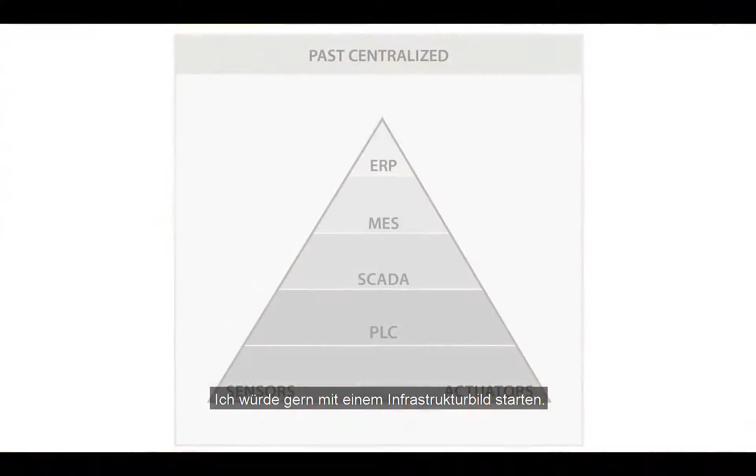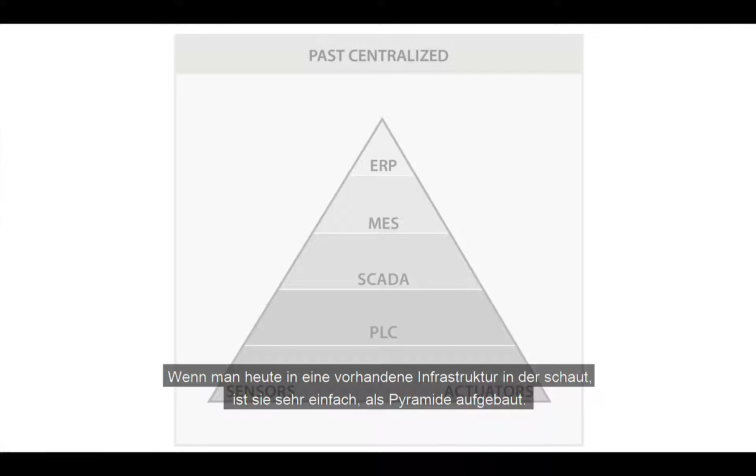My name is Sai Seidel. I'm working in corporate marketing, and I'm also talking to you about that topic. And I want to start with an infrastructure picture we want to show to you. So if you look into the proven infrastructures you have today in your automation hierarchy, it's quite simple. It's a pyramid, as you know, as you probably work on, which is working, and has been working for a long time.

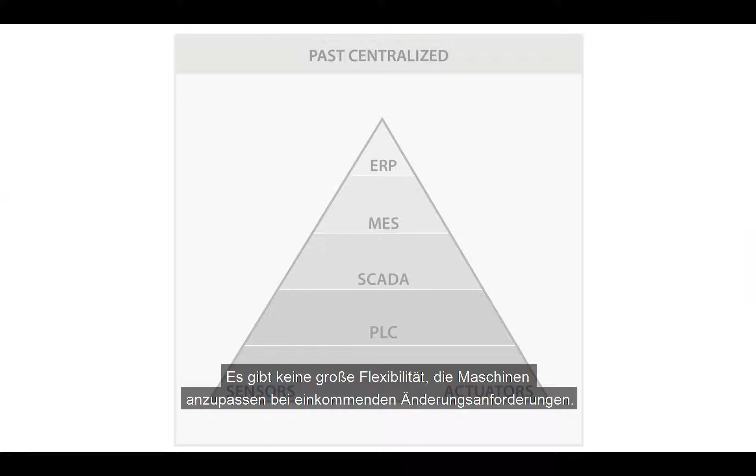But as we all know, you have a design of your machine which will be quite monolithic. You don't have the flexibility to change some things if you want. So as soon as you get a customer requirement to change something in your machine, to adapt something, to improve something, it's getting a little bit harder because you have to start on the top and then you have to go down. And the control is the heart of the machine. As a lot of customers told me, they have the control in the middle, in the core of the machine.

Of course, the whole stuff is usually built up in IP20 in a big part of it, and that makes quite a big footprint of the machine because the cabinet is quite big, as you know. And the data flow in that whole automation is quite strict because you have that hierarchy, and there's no way outside of that hierarchy. Of course, in the end, it's very costly, can be very inefficient, and you have to take care how to improve something. And if you think about how you get up a modern infrastructure, maybe you can take this part.

Yeah, thanks, Sai. So what we saw over the course of especially the last 5 or maybe 10 years, along with technology trends of industrial Internet of Things and Industry 4.0, is that customers step by step get away from this very static pyramid architecture in automation. They are not at a fully interconnected cyber-physical system yet, but what we see today is that customers take much more care about modularization, breaking their system into modular standardized components, routing communication that is meant to control the process still through the PLC.

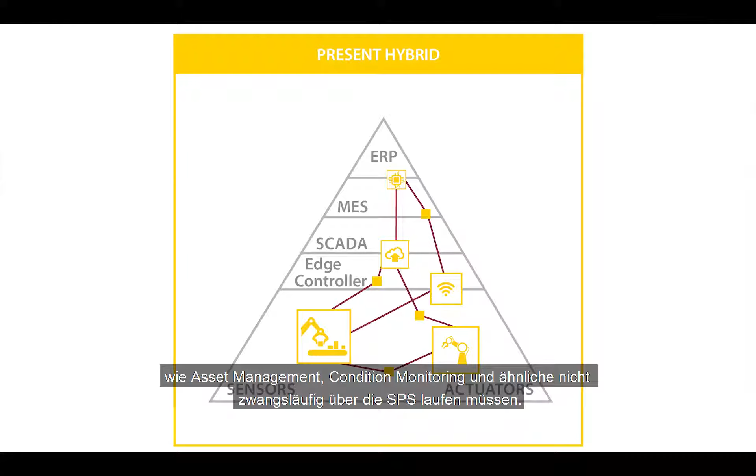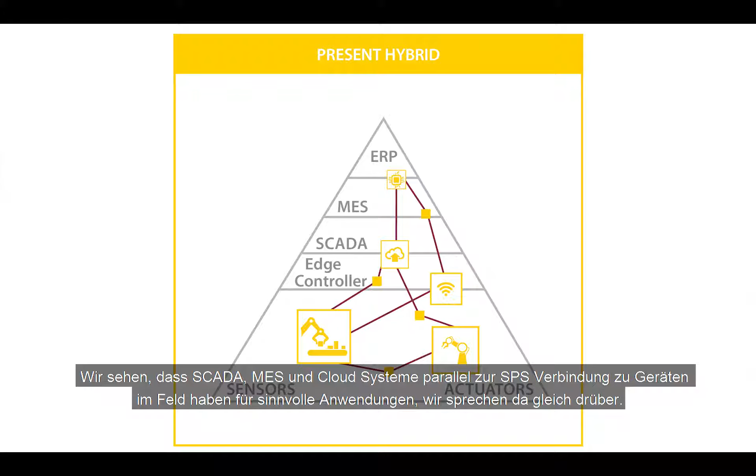We see some customers that are using decentralized automation for that as well, and we are going to talk about why that is a good idea in certain applications. And we see that new use cases like asset management, maintenance, and condition monitoring are not necessarily only routed through centralized PLCs anymore. Systems like SCADA, MES, or even the cloud are connecting in parallel to the PLC to devices that are located in the field for good reasons, and I will explain that later on as well. So that is what we see right now, and why should you care?

So one thing is that as soon as you start to design or break your system into individual standardized components, you are able to reuse those modules. So that's the overall idea of modular design. It's like design once, use multiple times, and that will make you faster in the end as soon as you can reuse things. You will be much more flexible.

We supported a lot of customers within the last 10 years in modularizing and standardizing the individual parts of installations and machines. And many of them already have a kind of toolbox right now out of which they can orchestrate larger systems. So it's more like orchestrate and configure, and not start over from scratch and redesign everything again.

And every software developer is supposed to know that. So modularization in software started in the 70s. If you work on modules and components, the test vector is much simpler and much smaller. So it's much easier to test, validate, and maintain those devices and hand them over to new staff.

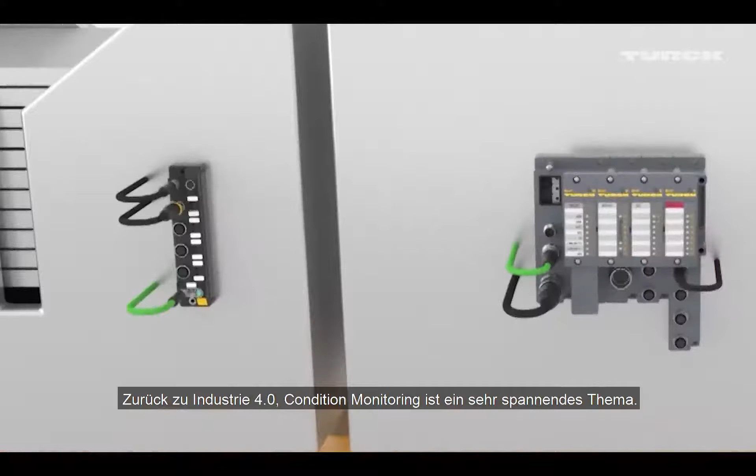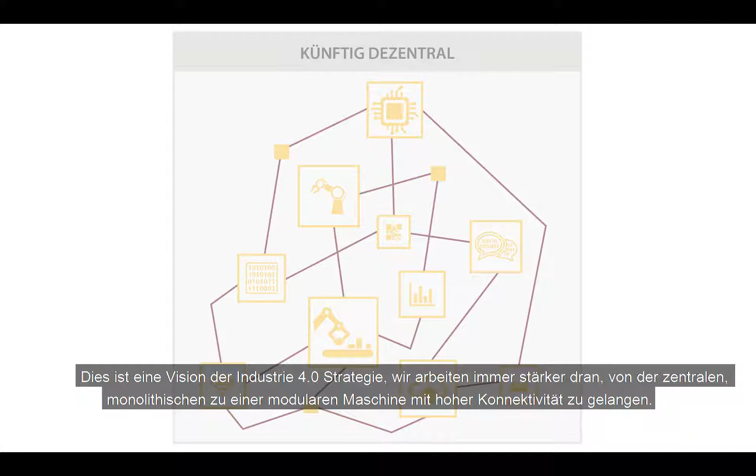You already mentioned that cyber-physical system. So in a world following that decentralized stuff, we will have a very connected, very IoT-based world where everything is talking to everything. So it's a vision that the industry has had for some years now, and we're working on that to get further and further to that world, that we go away from centralized, very monolithic machines into modular machines with very high connectivity inside. And this is what you really call industrial IoT in the end.

So talking about that, what does the data strategy look like in a modular machine? Yeah, that's a really good question, and that is a very important key. So decentralized automation in general is a key technology for efficient sensor-to-cloud communication. But it's not like every data has to be communicated to the cloud. You don't need tons of data in your cloud. That's a potential security attack vector if you communicate too much.

So there smart and intelligent devices come into play. Turck is offering a rich set of sensors. We have remote IOs, and we have the edge gateways offering all the connectivity to connect to individual systems. However, more or less any of those devices has logic capabilities inside. Some of them are optional. You don't have to use them, but you can use them.

And that makes it a world of edge controlling devices which enable you to apply smart filters to your data, which enables you to pre-process things. And that, once again, enables you to individually select the correct data to forward to the cloud. So what is meaningful in the cloud, what is not meaningful in the cloud. And that, at the end, it's kind of the combination.

So decentralized automation and modularization is on one side. It helps you to reduce costs, reduce the total cost of ownership, and it sets the infrastructure for all the modern IoT and Industry 4.0 use cases that you would have in terms of sensor-to-cloud connectivity.

Breaking your system down in smaller, maintainable components and modules helps you to hand over and maintain those things with different people. And the same is true with testing the component. Having a large monolithic system, it's nearly impossible to reach a test coverage of 99%. We would never reach 100%, by the way, but breaking your system down in small components, it's really simple to reach a really meaningful test coverage up to 100%. So one of the major benefits is that you get a more reliable, better tested system while being quicker.

What you didn't mention is IP67. Oh. And this is part of our DNA at Turck. Our company focuses on IP67. Of course, there are some more technologies, but everything we do, especially in the decentralized automation world, IP67 is a key to success. If you think about what Aurel said a minute ago, you have a hardware part and a software part in your modularization. The software part is what he was mentioning, but the hardware part in IP67 is really important to lower the machine cost in the end. And this is the real benefit for the customer, for you.

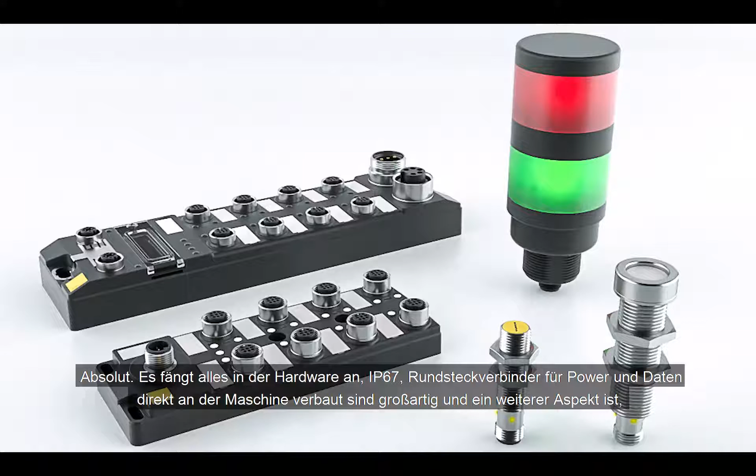You reduce your installation time, not only of the hardware but of the software. You reuse things. You can use the same modules, the same hardware for different kinds of use cases. I talked about the footprint for the cabinet a second ago. If your cabinet is getting smaller, your footprint will also get smaller. And this is something we can offer just by using that decentralized concept. Absolutely. Of course, it all starts in the hardware. IP67, round connectors, standardized connectors for power, data, and technology in IP67 directly mounted on the machine.

That's absolutely great. Another aspect is, as I said, your modules and your machines will become much more reliable since you have a better test coverage. That increases the availability of the system in general. And as soon as you offload logic into the field, which is not always easy, you have individual systems running on their own, which are not dependent on your central CPU anymore. And that increases availability a lot.

In several applications, we see redundant central controllers that control huge amounts of devices and data. But that's a critical point in terms of availability. As soon as you can offload things that work individually, you once more increase availability of your system. If one system falls out, the rest still operates as it's supposed to. Good point.

Coming to applications. You were talking about big machines and so on. We had one example in the logistics industry, because we have very big plants, but we also have the suppliers for those plants. One of those guys had a quite monolithic designed machine. His requirement was to get more flexible, more independent. He has 10, 20, 30 customers, I don't know, but he will have many customers, I hope for him. But he has to adopt changes for those different customers, and this adopting is really taking a lot of time.

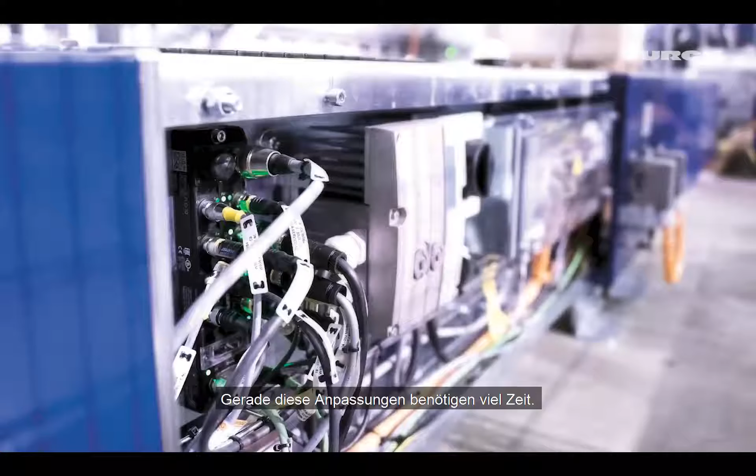And as soon as you're getting into the modular world in your machine, you can do that whole change process in a very smart and quick way. And this is something he was requiring. And in the end, the customer built that up, and we helped him to get from a monolithic point of view to the modular machine in the end.

And now he has a design which is really flexible and, of course, creates a very high value in terms of time to market, high availability, and so on. Yeah, absolutely. That was great.

And by the way, the customer is not yet there, but his vision is, so it is related to a cold storage transportation system. Nowadays he's charging for the machines, for the installation that he's offering. But his vision is to transport as a service based on his modular installation systems.

Right. Yes, and as you're talking about logistics, we have another nice success story from logistics. This one is about conveying systems, but in a very special way, and it's not limited to, but often used around e-mobility. For instance, we have one example from battery production, where the conveyors would transport individual parts from assembly stations to test stations.

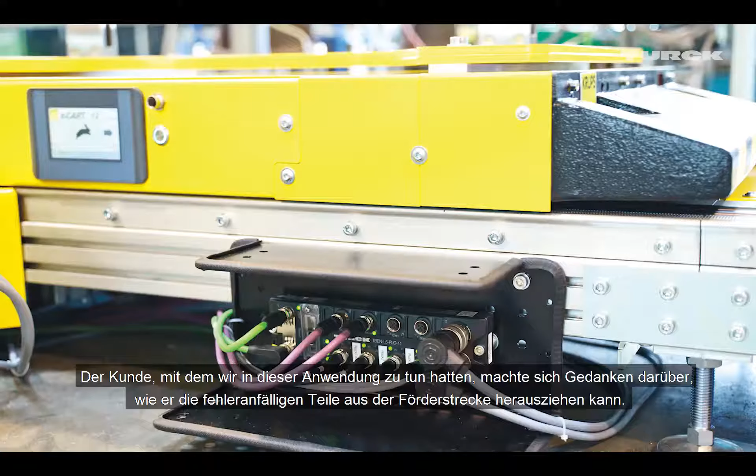So the customer we dealt with in this application made up his mind on how can I pull this error-prone stuff out of my conveyor track, and he implemented a passive conveyor track with smart conveyors. Those smart conveyors have, to a certain extent, even predictive maintenance capabilities. But in case one conveyor cart is broken, he can pull that off the track and the whole system still works. He just has to replace one conveyor cart.

And that's really interesting. And that customer standardized on a very small set of modules that he needs to drive that conveyor application. So he has these smart carts, he has stations to push out carts and load and unload stuff, he has turntables, and all of those are individual modules controlled with logic. And those usually get integrated into a larger system, into the installation where the main PLC runs.

And one of the super benefits the customer had, next to having a modular set and being able to extend and adapt the system as in the application story I just mentioned, is they were now able to offer a very clean and easy to understand interface towards the integrator, because in the past they always had trouble with the knowledge transfer to the integrator. The integrator in the past was responsible to control large parts of the logic around this e-cart system and the conveying system, which is not easy. So there was always a gap in knowledge transfer.

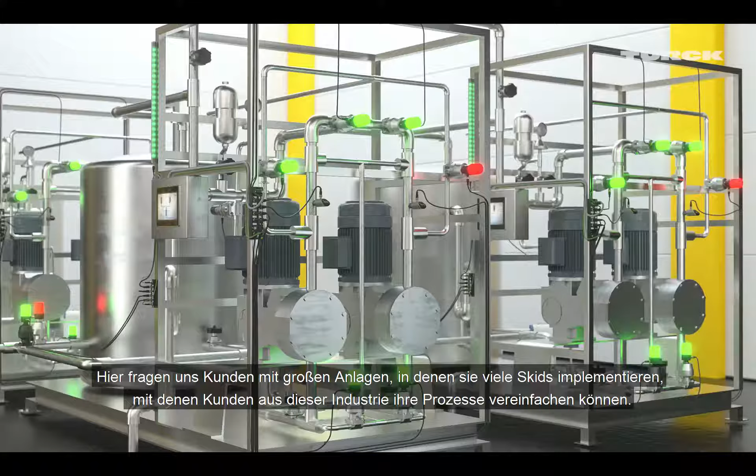It's called FLC, Field Logic Controller, programmed in our interface called ARGEE. And with this, you can provide little logics, little applications inside of a smaller unit. And you can also do things like a factory acceptance test. In the pharmaceutical industry, for example, customers ask us about that. We have big plants where we have to put in a lot of skids, and pharmaceuticals are working with skids to have an easier process in the end.

So this is the first step to a modular machine in the end. And they have that issue that they have to test the skids, and we can provide them the possibility to test it independently and then put the tested unit into the whole plant, and the rest the end customer has to do is, more or less, only the big test of the whole setup in the end. He doesn't have to test the single units. And this, of course, is a high value for time to market.

Absolutely. And so to finalize, the basic key features of decentralized automation at Turck. As I said, IP67 is one of the very big topics we have in our portfolio. You lower your footprint. You create a high value in terms of design, in terms of costs, in terms of installation costs, and you go the first step into the modular world.

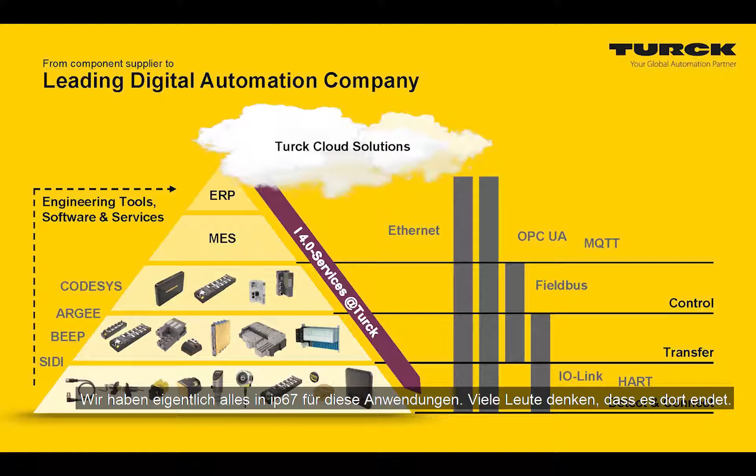Yeah, absolutely. So modularization in hardware, using IP67 technology and round connectors, is absolutely the foundation of modularization for us. And it starts with the sensor, goes to the remote IOs, edge controllers. We actually have everything in IP67 available for those applications. But many think it stops there. But we go one step further and already have the technology to add intelligence to those devices.

And one thing that's really interesting and challenging, and I know that many of you will have trouble with that, or thought that this is a challenge that's not easy to overcome, is as soon as I break my system down into modules and try to add logic, it turns out that where I, for instance, in the past used standard remote IOs, I need something that has logic inside now. And that in certain applications, depending on the complexity, might be a little bit too expensive. Adding logic to really small components may add too much cost because you have to invest in small PLCs or what have you.

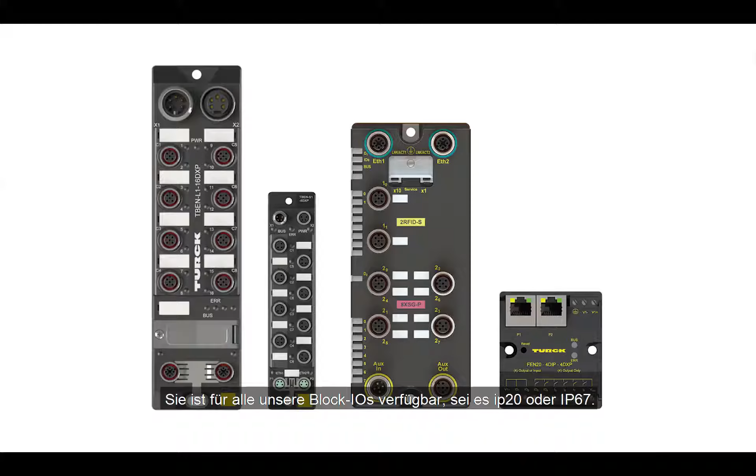And that is where our, you just mentioned it, field logic controller capability comes in. So on all of our block IOs, be it IP20 or IP67, we have the optional capability of adding logic to those devices at the cost of a remote IO. And that really enables you to add logic even to your smallest components without increasing the cost. So in the best case, you already save cost due to your modular design and using IP67 technology, your cabinet being smaller. And at the same time, we enable you to add logic whenever you want to.

The next level is we of course have the technology for more sophisticated and comprehensive modules. Those are the application stories we just referenced from logistics, where they used our IP67 edge controlling devices with PLC capabilities. Those have enough performance to serve even complicated applications. Yeah, they're full-blown PLCs in the end. You can control the whole application if you want. And you mount that PLC onto your machine. You don't have to do a cabinet and so on. And this is where we increase the flexibility of our customers themselves. So, absolutely.

And that brings us to the end. As we said, it's in the DNA of Turck. A lot of what we design is driven by the fact that we want to support you in modularization, in decentralized intelligence, in decentralized automation, and it doesn't stop at the hardware. Turck can offer you smart sensors, for instance with IO-Link or other interfaces, and we can already generate data coming from the sensors in a digital fashion. We have all the technology to process this data, pre-process this data, connect it to any superordinated system, even up to our own cloud service. But we can connect to other cloud services as well.